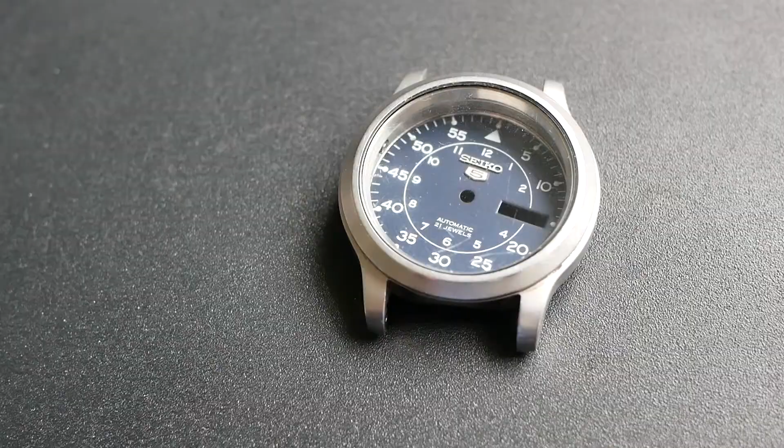I want to design something which makes the best use of 3D printing technology. I don't see the point of using 3D printing technology to simply design something which can be manufactured using a normal method. So all of those simple flat watch case designs, I'm just going to try and avoid those, or at least put a twist on them that means that 3D printing technology has a presence in the final product.

So with that in mind, I now have a few requirements for what I'm going to design. First, it needs to be printable, so I can't step outside of these boundaries. Whatever material I pick, or maybe I might pick the most coarse material and I know all the other ones will match that, so I can't go outside these boundaries. I also want to make sure I design a watch that makes use of, like a showcase of 3D printing technology, so not too simple.

And finally, it should be a design which I actually like, because I don't see the point of designing something you don't like. I think that's the artistic side coming into it, that if you were just designing things and you didn't care what it looked like, then that's like just designing something utilitarian that has no sort of interest for me. But if it's something that you want to enjoy, and watches are very much like that, then you really can't stop designing it until it is something that you do like. Either you like it because it looks great or it has a nice feel to it. Yeah, so those are the three things.

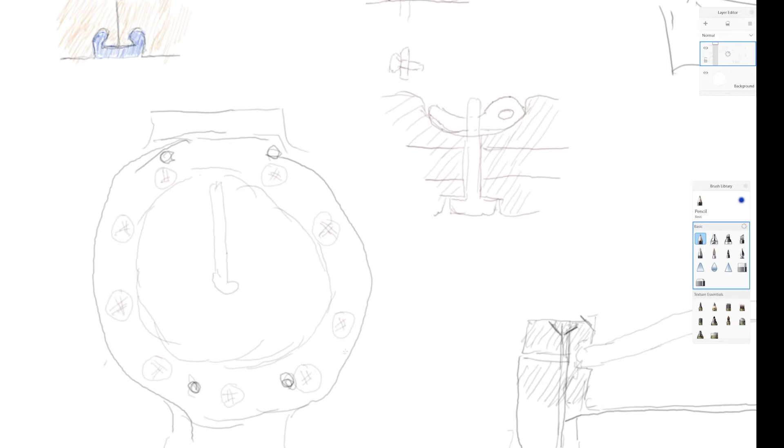I had a few sort of dead-end failed ideas, like this thing here, which were little tabs around the outside of the watch. So these would be around the outside of the face. And then on the other half of the watch would be these arms that would come down and be slightly spring-loaded. So each of these would slide over and then lock into the little buttons coming out. I don't know, that design doesn't really appeal to me that much.

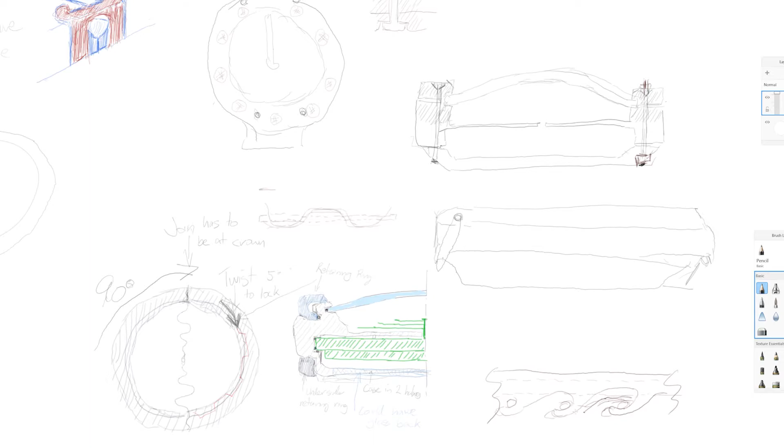Here's another version. This design is a watch cut in half, either top to bottom or side to side, and it has a retaining ring that locks around the top, and then another one around the bottom, that little guy down there.

And this retaining ring could either snap on, so have a design which allows it to just flex a little bit and be forced on to the top of the watch, or another option is to have these interlocking teeth on the ring, which can be big and broad, allowing the ring to be slotted in, pushed down, and then turned a certain degrees, maybe 5 degrees. That would lock that ring in place, and the same would be done for the lower underside ring.

This design also features a glass back. Obviously they're going to have a glass front. This one has a glass back as well. So the metallic printed part is each half of the watch, including the watch face, but not the back and not the front. And then there'll be a ring, a top ring and a bottom ring.

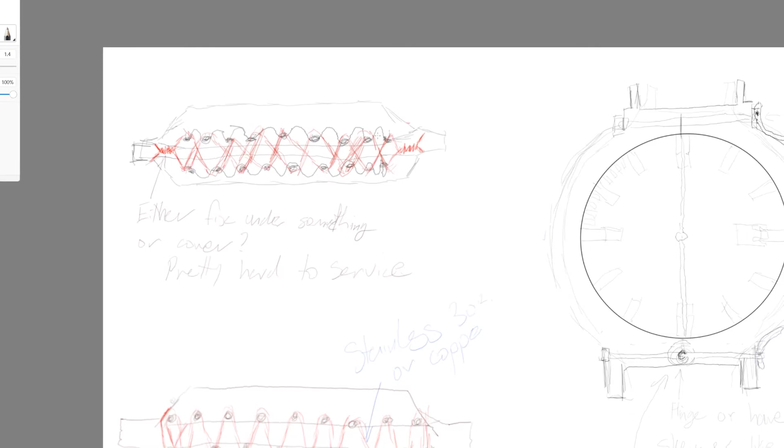These are my metal lace designs, metal wire lacing. So this is where the watch is cut across horizontally. So the front of the watch is the top, the back of the watch is here. And we have a core section of the watch in the middle, where you're using copper wire or maybe stainless steel wire around little teeth or some sort of hooks. And then it's a matter of how the wire is finished off.

Zoom in down here, this is a design where there's a single lace going around the outside of the watch, or around the edge. And then the end of the wire is slotted into a little groove and pushed into that groove along this path, so that once it's pushed in there, there's a fair bit of friction on it and it will not come loose.

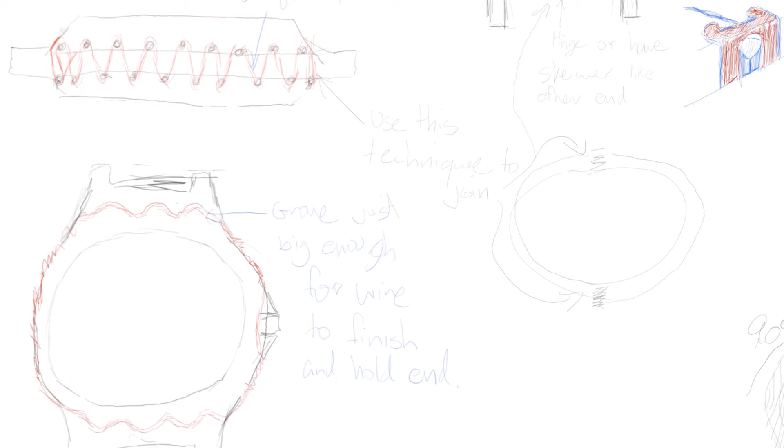But yes, to do it you need to use copper tweezers or something to pull the copper around, I guess pliers, and lace the watch together like that with copper, which would be interesting, but a bit fussy, a bit slow to work on. I'm not sure if it's ideal, but it would definitely be a unique design.

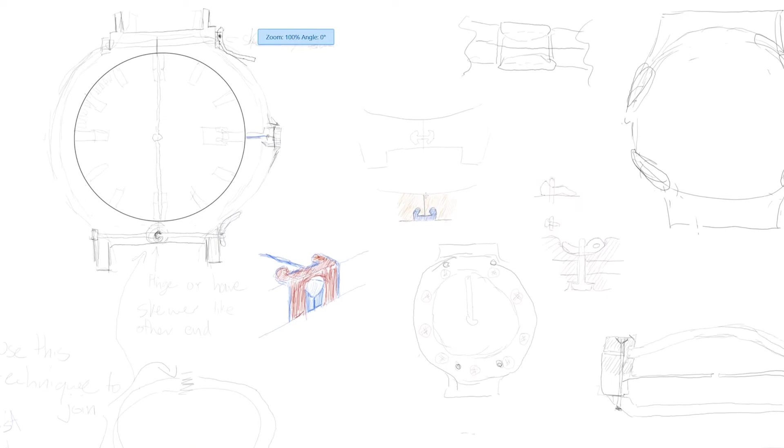Next up we have, this is probably my last design option that I'm sort of favouring at the moment, which is a sort of clasp design where the body of the watch on each side, this part of the watch just here, the two halves are kept together with some specially designed little clasp which gets pushed in with a pair of pliers very delicately to join the two halves together.

When I started thinking about this, I came across a problem which I will attempt to switch to. It's got to do with the crown and pin and how they work into a movement. If this is joined at the bottom of the watch, then the crown and pin needs to slide through a hole on the edge of the watch where there's no join. And so that hole means I need to remove the pin and crown from the movement, from the watch mechanics. That means difficulty.

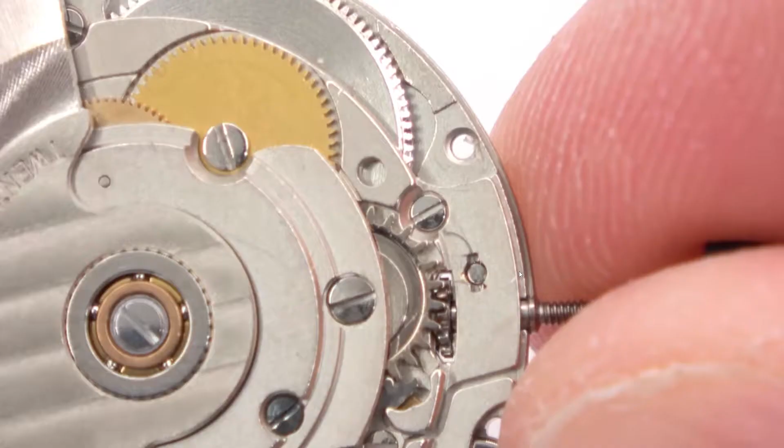It means that you need to have access to a part of the watch movement in order to do this. It means I can't have anything in the way, which excludes some of these designs straight away. Here's what I mean. This is the movement that I'm planning on using, or one very similar to it. And if you focus in on this little guy here, this is the little button you have to push in using a tiny screwdriver in order to release the pin and the crown from the watch body.

And you need to do that in order to then put the movement into the watch case and then reconnect the pin and crown once it's in place. Now with this particular movement and some other ones, you have to be careful. You can stuff this up.

It's not necessarily a user-friendly thing. If this was going to be done by just any old person, you could easily get it wrong. Even for myself, I need to be very careful doing this. It makes any designs where I don't need to remove the crown and pin a bit more attractive.

So here's a design where the crown and pin don't get removed. Instead of having the watch cut top and bottom, we cut it on the side here and on the side there, and have this sort of clasp design that accommodates a hole where the pin will go through. So when the watch is put together, you

rest the movement in one half of the body, which would be, say, the lower half, and you align the pin so it's just snugly sitting in half of this hole, and then you bring the top half over and it sits to the other side of this hole, and then the clasp goes in over the top and locks it all together in that position, creating the final part.

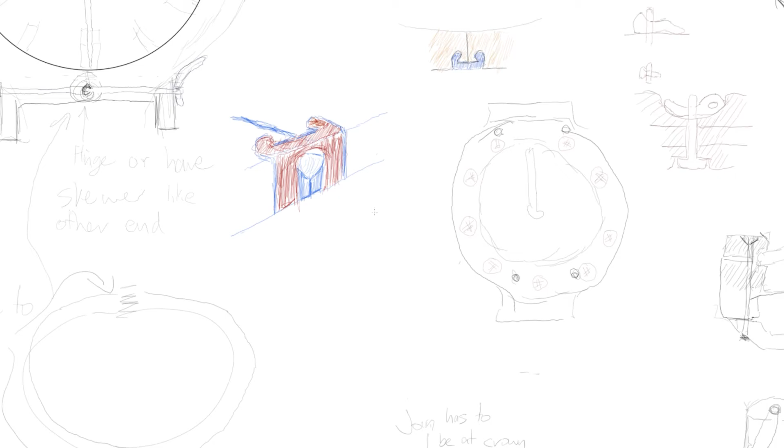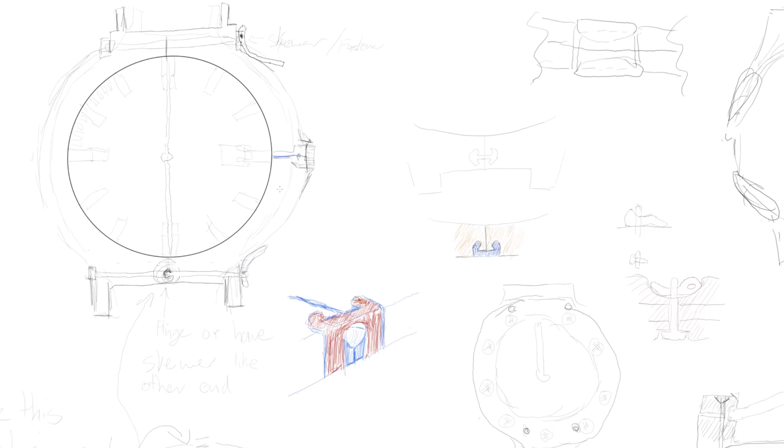And that way you can have it done without needing to take the watch apart at all, except this is complex. It also means that the watch is slightly stressed from the band here where the watch is connected to its band, and these little clasps take that force. The only thing keeping the two halves of the watch together is a clasp on one side and a clasp on the other, so this has to be quite a strong thing. It might have to be made bigger than this too to make it work.

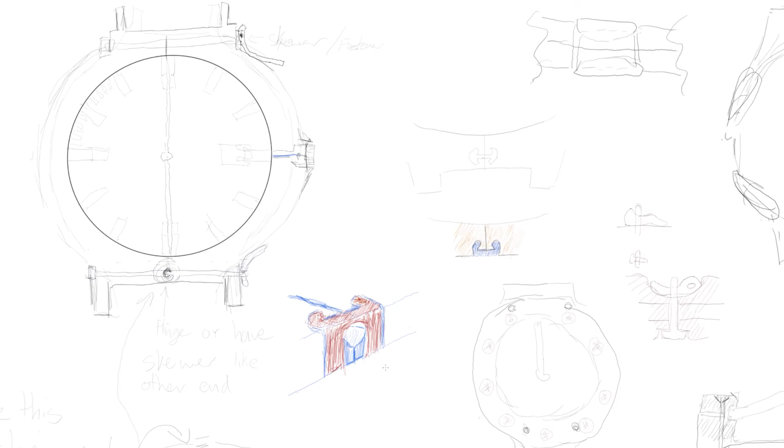But in any case, it's an interesting idea. It could be big enough, it could be strong enough, and it might solve the problem. And I also like that it's pretty simple in that there's only 4 pieces and 2 of them are tiny. So we have the bottom half of the watch, top half of the watch, and one clasp on this side and another clasp on that side, and that is that. I don't mind that. Around here you can see some other design ideas I've had.

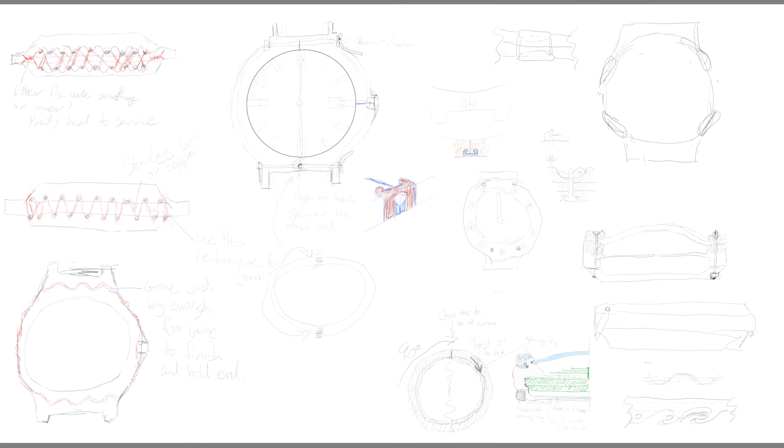Just to let you know too that this pin and crown design can be solved other ways by having watches which are joined up like this, because with this design you can easily accommodate a little groove for the crown to go into. So these designs don't have this issue. So this is where I'm up to, the current design.

I should add that I since watched a few more videos about putting movements into cases, and I have a hunch I need to remove the stem and cut the stem shorter. In any case, the stem's probably going to come too long, and so I'll definitely need to take the stem out and cut it. So there goes the plans of trying to avoid doing that. It's actually not a big deal. When you see a bunch of people do it, it's not so hard.

So next thing will be to buy the movement. I really do need that in order to move forward. Yeah, so I'll buy that. Maybe the crystal as well, the front and back glass, and a few other things. Yeah, and so I guess that wraps it up.

Sorry, today there's no OK Miles Google thing. But Miles, I told you I have some important information. Yeah, she's just not working today. Hey, I'm working just fine. The internet's not working either. Hey, I just so have a connection. See. Hey, cat videos. Stop it. What are you doing? I told you I'm very powerful. Ugh. No, but it's very important information.

No, it's not. No one really wants to hear about it. Yeah, actually, why do you do these at the end of the videos? No one is watching anyway. I sort of like that no one's watching. Doesn't that defeat the point? I don't know. Does it really matter if someone watches? I mean, I just did this for fun. I sort of like that.